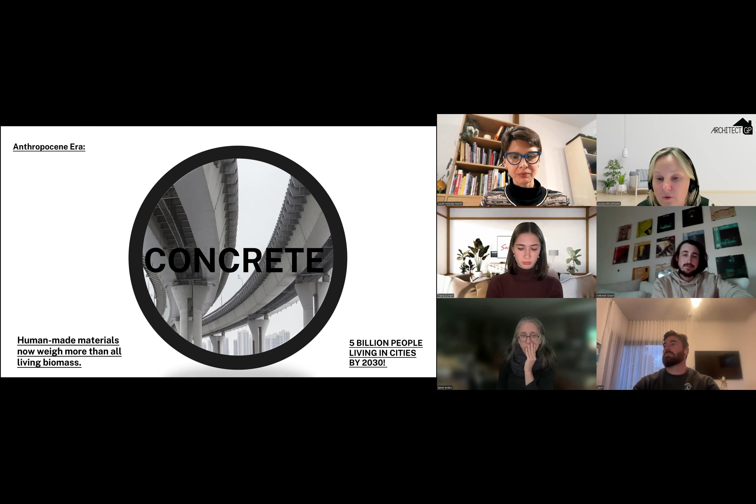But houses are important, buildings are important, but how can we get a little bit of emphasis back on trees and biomass? I think that's one of our big challenges now. I've seen this slide a lot, you probably have too, but it's good to contextualize it. The building industry employs 7 or 8% of people, so it's an important employer, but it's also a contributor to climate change.

So we can do our part. It's something that, you know, I've been working for 30 years and I did study sustainability at university, but it hasn't really been mainstream in practice. It hasn't really been discussed amongst my clients as much as I would have thought in my career, but we are seeing a big upshift in people's awareness. I might be alone, but I do think the industry has really kind of ignored this a little.

And we have been building some of the world's biggest houses, and that's a little bit of a shock to think about. How can we live in houses bigger than—you hear about the Americans, but they're 236 square metres. The average Australian home is bigger than the average new American home. It's quite surprising—the land is big, and we are bigger.

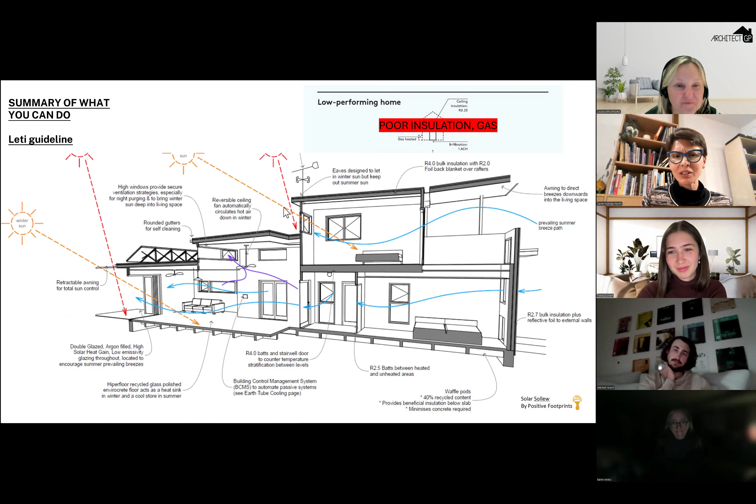So Australian houses are leaky. I hope everyone feels inspired to think about insulation, that it's sexy. It should be sexy talking about insulation. You know what else is sexy? Draft proofing, and we'll get on to that. This is a great slide from Jeremy, I'm a huge Jeremy Spencer fan.

We're going to show you one of his other diagrams, but this talks about our values for insulation, 2.5 for the floors, and obviously getting your orientation with your sun, thinking about the sun, getting it in when it's winter and cold, and looking at prevailing winds. So I think that's a great diagram that we probably need to pin up and stick on our wall.

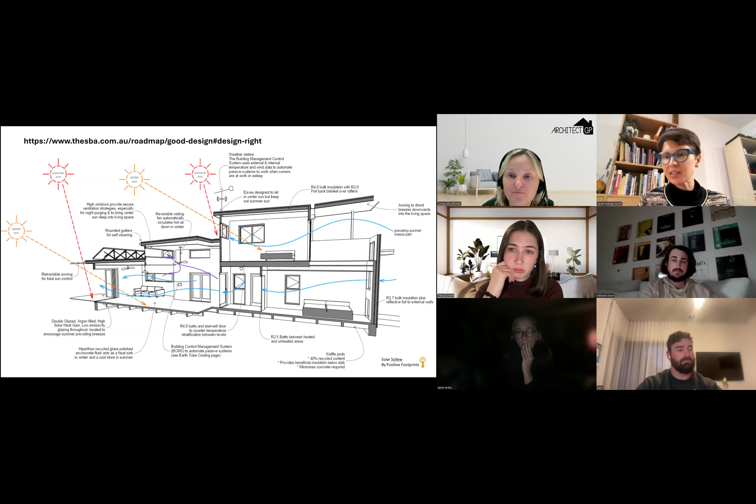Yeah, he's got R2.7 bulk insulation as kind of a rule of thumb. And I reckon, especially for southern areas, anywhere Sydney and south, that's kind of where we're at. But even the NCC puts the R value, so your insulation rate, your wall insulation standard for walls in Hobart, about 3.5, just as a minimum standard. Whereas up in Darwin, tropics, it's still 1.4 because insulation works both ways.

So it's putting a blanket around something, whether you're keeping it warm or whether you're wrapping your ice cream in the towel in the back of the car so you can get it home. Insulation also helps keep things cool as well. So yeah, it works both ways.

And most of us are living in single glazed houses, and that's why they're cold. So, spending the money on double glazing and low E, I think is probably the next step. And the next step is thermally broken frames, because you don't just lose heat through the glazing, you lose it through the frame itself. So if you're going aluminium windows for maintenance, longevity, and ultimately recyclability, if you can afford thermally broken, that's another step with your double glazing.

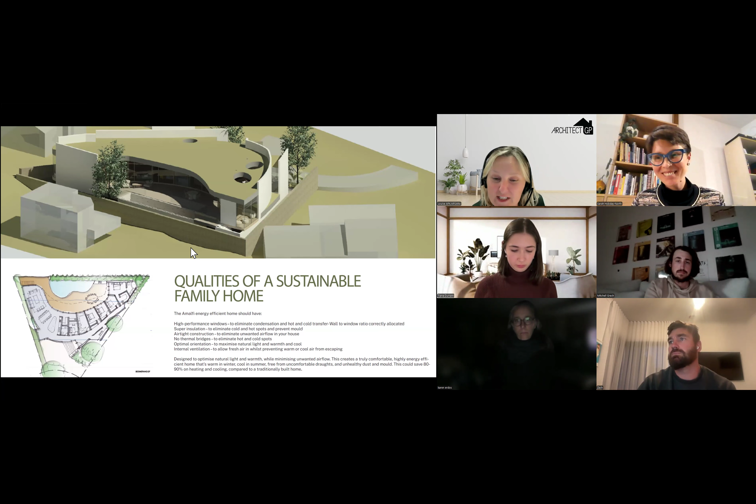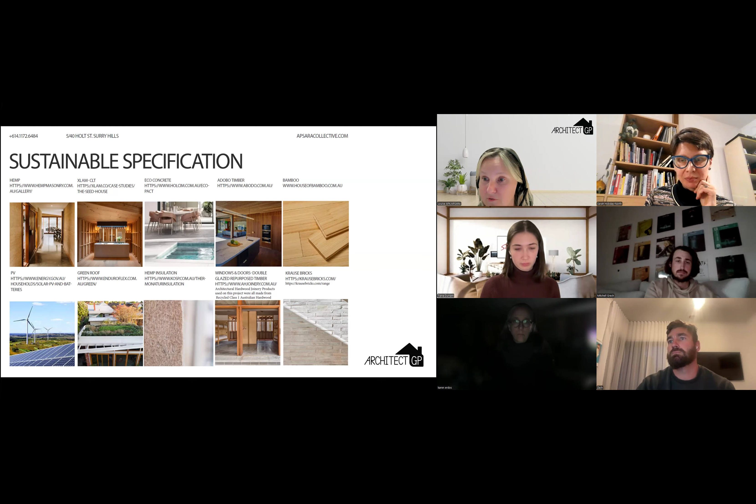Capturing the sun. And I'm trying to tell my clients from early on all the sustainable principles that I'd like them to use. I did find a lot of this information out, I have to be honest, from the Breathe material guides, as well as a lot of the training sessions I've been attending over the years, and trying to talk to my clients very early on about the look and the feel, and getting them to do their homework.

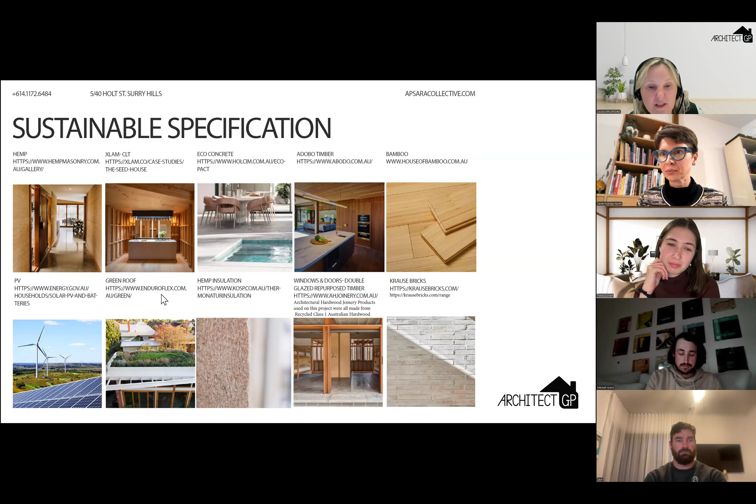So hemp, I think, is really the future. CLT, eco concrete, looking at trying to repurpose Australian hardwood doors and windows if possible, hemp insulation. Krause bricks are actually low carbon, looking at House of Bamboo, looking at air tightness, heat pumps, appliances, and tapware with the no plating from Sussex Taps, and really just trying to get my materials and approach correct.

I'm sure most architects in Architect GP Service are doing the same thing. But look, I think around the world, we're seeing a lot of education about getting insulation looking sexy. Look at this with the chunky insulation. This is in Germany, but really teaching everyone who's walking by and who's on site, putting that drawing right there on the facade so everyone feels connected to the importance.

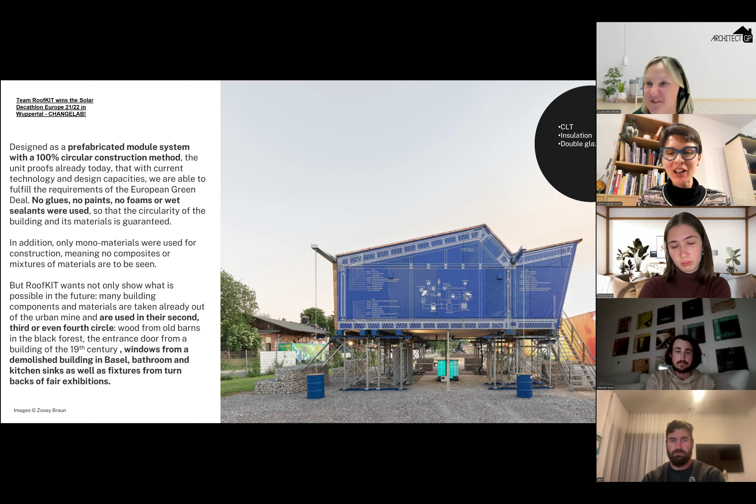It's a great one for the builders, because look at that. Our drawings are our blueprint. It's what gets built. They're not just lines on a piece of paper. It represents real stuff happening on site.

I love this 1-to-1 scale. It's a work of art. Yeah, maybe I should do this more. But this project here, if anyone wants the link, is basically designed for disassembly, no glues, no paints, mostly recycled elements, and it's a beautiful little humble design, and I think this is really the future of where housing's going.

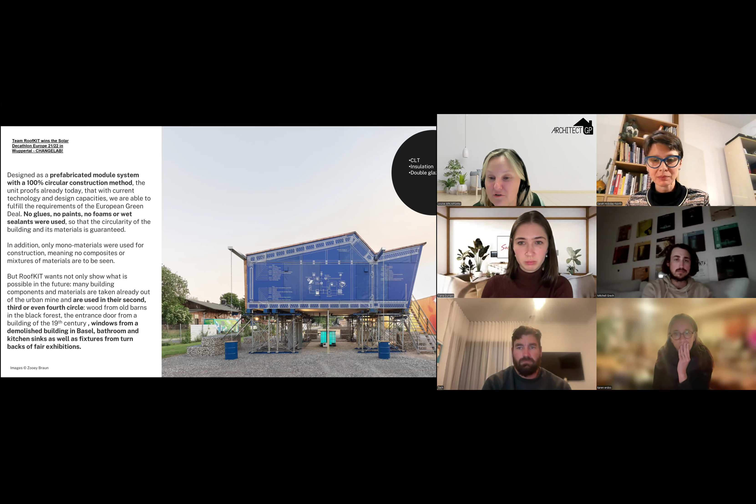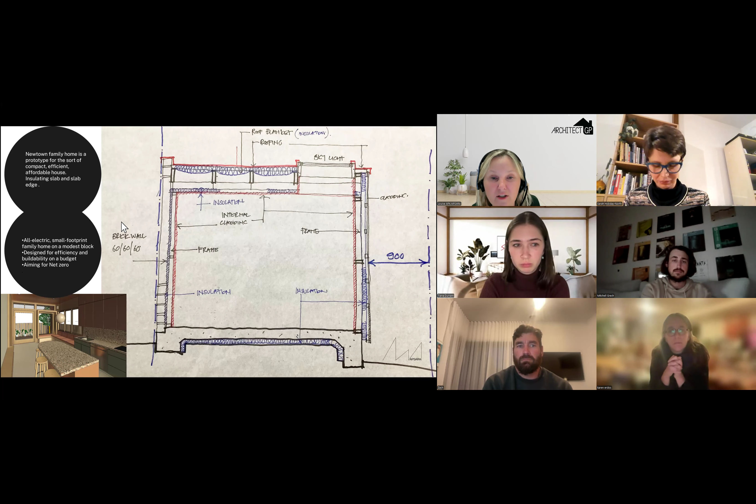So there's a lot of technical data that we need to really embrace about getting it, the cost versus the thermal. That's where I think I want to head next, is learning a bit more about that. But for the moment, what I tried to do was start to get my values in and check all the performances, and I was aiming for 4.2 on my walls.

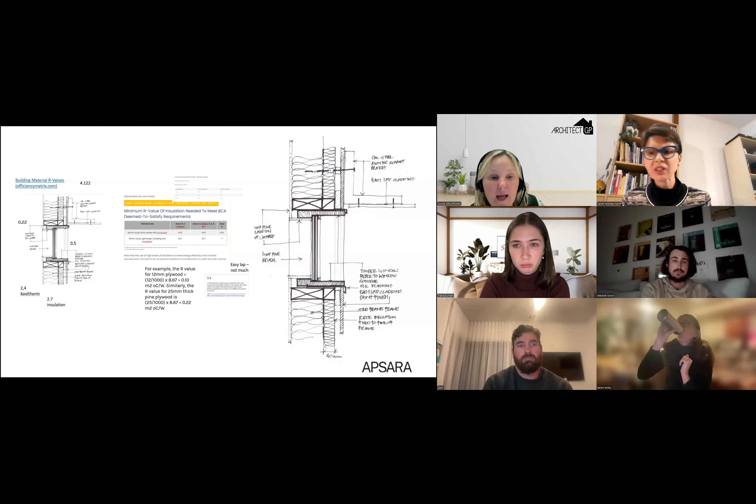I was trying to have good conversations with the builder about these ideas and run it through the client. On a recent project I inherited from another architect, we discussed with the builder how to increase the R value for the external walls. The most efficient way was to upgrade from 90mm studs to standard 140s around the perimeter, so we could fit a thicker batt instead of R2.5, we used R3.5 batts. That has transformed the thermal performance of the envelope, and it's a really practical builder-led solution.

What I want to say about this is building wrap totally matters. Whether it's wrap, sisalation, sarking, or a vapor barrier, there's technical terminology and functions, but a building stud frame at construction should be wrapped up like a department store present, taped, sealed, beautifully done. If it's flappy, if it's got holes, if where pipes come out at penetrations it's not taped and sealed properly, your building becomes like a colander, letting draft permeate between your weatherboards and cladding overlaps. You lose the beautifully conditioned air, whether passive or active, and you're almost living in a tent if your building wrap isn't properly sealed. This is about site culture, and also about an owner who knows to demand it and expects that standard.

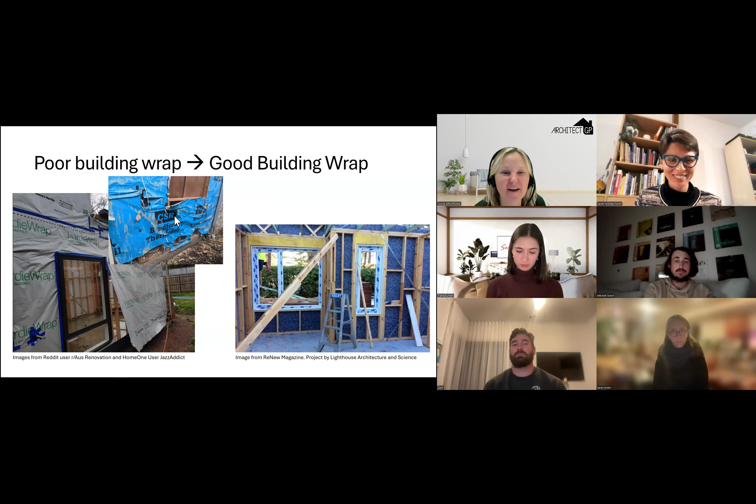So, Jeremy Spencer with Australian Builders Declare produced this checklist that I can give you the link to. I follow Jeremy now — this is a 2-page checklist for builders and all subbies to tick off as they go, giving the client quality assurance. I think this is a wonderful document for consumers to know that after paying significant money and time, they'll end up with a better product. I've now put this in all my documents and share it with the client and builder early on. Young builders want to do this, so it's about working with the right team. I feel like this is a no-brainer, and I'm so happy Jeremy shared this. I now put this standard into every one of my projects, so I know clients are getting what they paid for — airtightness and quality construction.

So just in summary, building less and building smarter is where architects are really good, making sure your smaller building gives you what you need and works efficiently — looking at orientation, window-to-wall ratio, reducing glass but putting it in the right spots, thermal efficiency, natural ventilation, getting off gas, looking at shading and dematerializing. Once you see it like that, I think it's easy to do. What do you think, everyone?

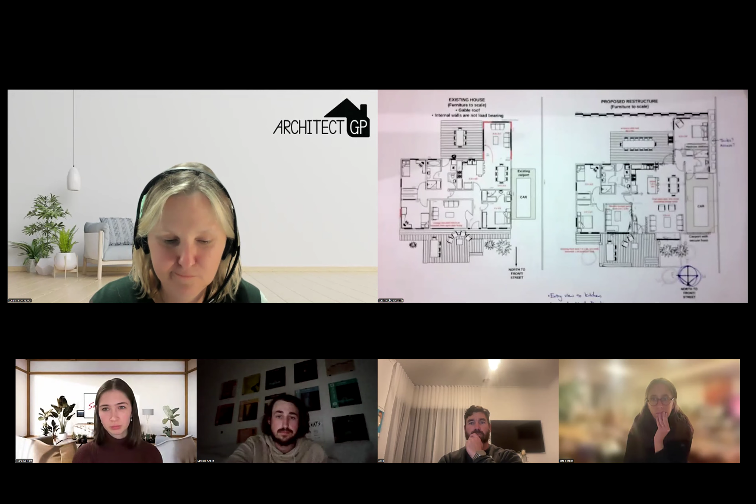I'm here, but I didn't send a floor plan in. Oh, probably wasn't me, sorry. Let's see, anyone? Sorry, I haven't got my camera on either. That's okay Jane, thanks for being here. Me, that's me, oh here we are. The other Jane, welcome, thank you very much.

Thanks. Okay, so we've got an existing home that you're renovating, extending, with a new bedroom wing up here. So what are your maybe top two concerns that have brought you here, that you're thinking about in this plan?

We have actually been through a process with a building designer, and we were still trying to maintain all of the living at the back of the house, mainly for privacy from the street and the age of our kids. As time has ticked on and our kids have gotten older, and I start thinking maybe they won't always be living in this house with us, I start thinking again about whether we could reorient the living areas to the north.

The reason it does involve demolition of an extension lounge room at the back that is 3.4 by 4.7 meters, and shifting it, is also to have a master suite that could be locked off. We live in a holiday area, so that might give us some flexibility to rent the house out and go traveling and still have a room that's ours.

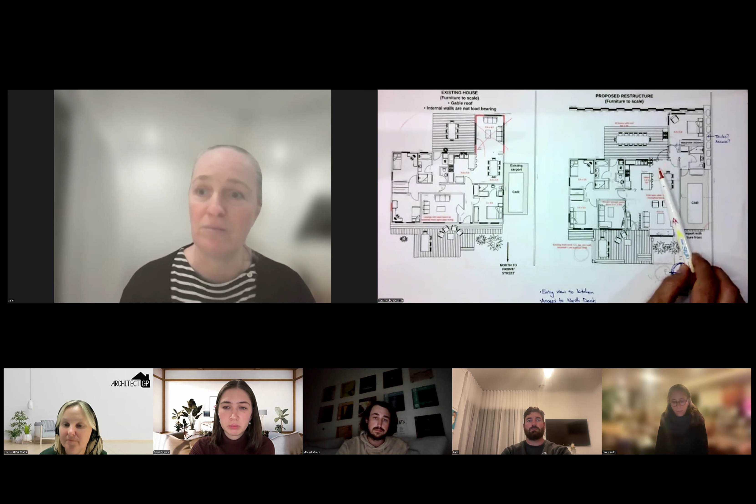But the main thing is living in a dark home that, in winter, the main living spaces are dark and cold, and not really open. I don't mind them being small, but they're actually quite compartmentalized at the moment.

Look, this is a great shift, and I'm aware we've got at least 3 architects in this call, so there'll probably be 6 different interpretations of how you could do various things. Great.

But shifting the living areas to the north is a lovely idea, and I'm pleased to see you're open to embracing a deck and a real living area at the front of the house. I think that's fantastic, it's a great community gesture too - you get to see people on the street.

I wonder whether, with that in mind, this window - it looks like you've envisaged that as a bay window or some kind of window seat - I wonder whether that is actually a sliding door. What if the deck extended here so that your new living space becomes connected this way, meaning you don't have to use just the front door to get to your new living area. It becomes a social connection from the room, not just from the main entry point.

And then increasing the glazing size here, you can embrace that north - the dotted line meaning roof overhang, with adequate shading for the summertime. But maybe that's a door to really embrace that front deck.

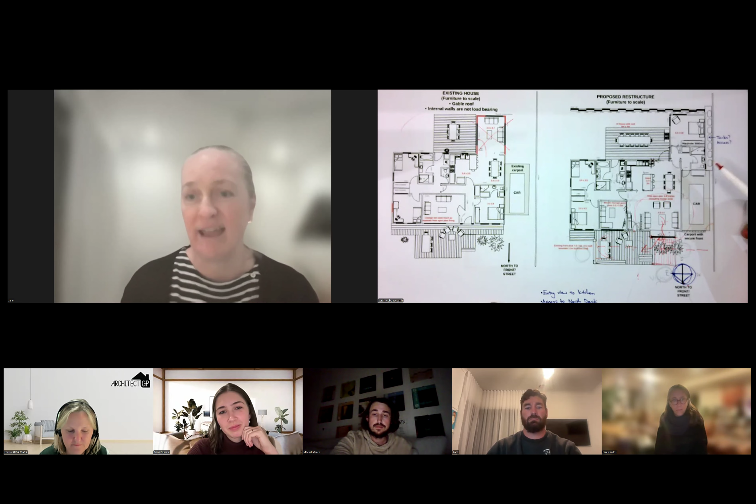Yeah, do you want me to answer? No, why not. There's a couple of limitations - the deck is already there, we expanded that during COVID out the front. We use it a lot, we've hosted band sessions in our front yard. Amazing, it's a great cul-de-sac that's really quiet.

I have a mature lemon tree in front of that window. Oh, I see. And I don't have a lot of sun because we've got a lot of gum trees, but I have a thriving mature lemon tree, and I feel like it is constraining me quite a lot because I don't really want to lose it, but I want to keep an open mind.

You've seen those gorgeous decks that have the tree breaking out of the deck. A deck doesn't mean obliteration - it could be a gorgeous, fun gesture at the front there, and the lemon tree even providing you some of that natural shade to the north.

Gorgeous, yeah, okay. From this, two more things I'd love to suggest about the floor plan. The east window through here - I see what you're trying to do with a secure, private zone at the back. I wonder about moving the door to the bedroom to be a cavity slider through here, opening up this throat.

So that you could actually have eastern glazing here, and this neutral zone becomes much more light filled, more open feeling to the deck - almost like a little breezeway, a little internal courtyard coming through. And then with another pocket sliding door here, you can close off various other sections, so this becomes more generous and larger without any loss of amenity to the bedroom behind.

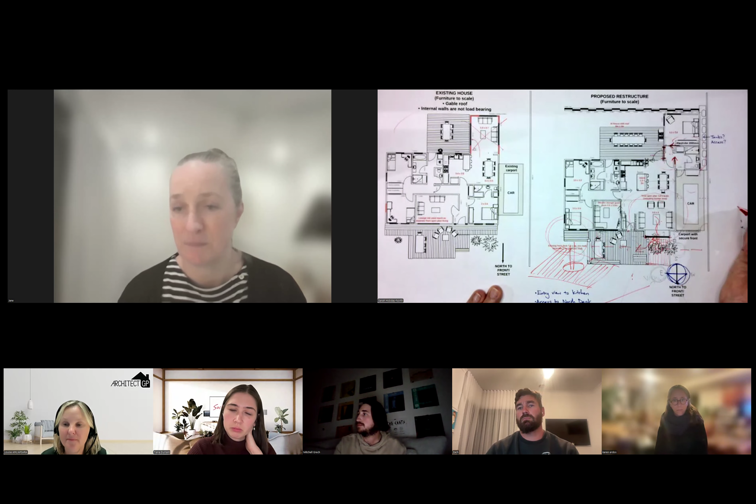And then coming in the front door, Louise and I noticed that the first thing you see from the front door is the kitchen, and maybe either a sliding door to close off and give privacy to the kitchen might be desirable, or retaining a bit more of the wall here to frame an entry space. Yeah, I like that - in that zone, so that you just give it a bit more grace. I get what you're doing here.

You want to be able to open up this lounge so that you could have a sort of combined space. But let's not neglect a sense of arrival into the home and then the view through to the kitchen.

And look, balancing the glazing to your south, I think might also warrant another look. Is this big door going to be a glazed door there? Could it be a slider? What's going to work best for the ease of access to make best use of this space at the rear?

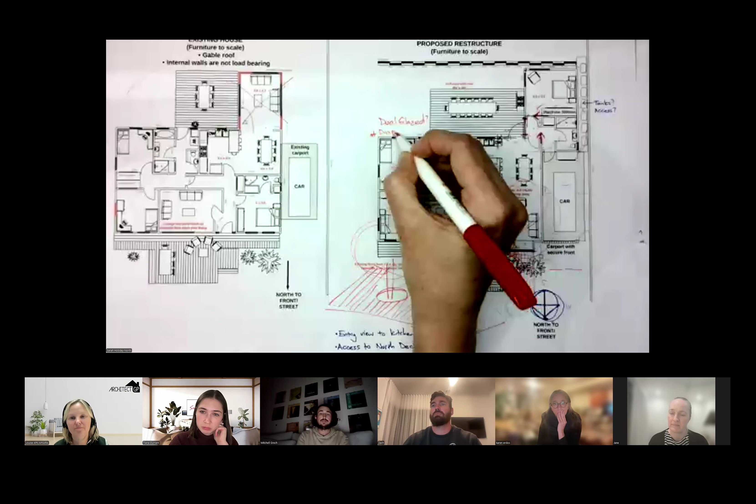And then, of course, your existing windows that get retained, can they be retrofitted dual glazed? And picking up on Louise's tips, drapes, even looking at a window furnishing strategy for those existing windows can increase the luxury feeling from an interior design point of view, but also the thermal comfort of those rooms long term.

I wondered if these were tanks. I haven't got time to talk about it much at the moment, but thinking about whole building, where can you store water on the site as well? Look at your roof pitches, look at your falls. Where are the downpipes naturally ending up?

And as you open up this new, expand on the northern area, think about the shading to this as well, so you get the balance right.

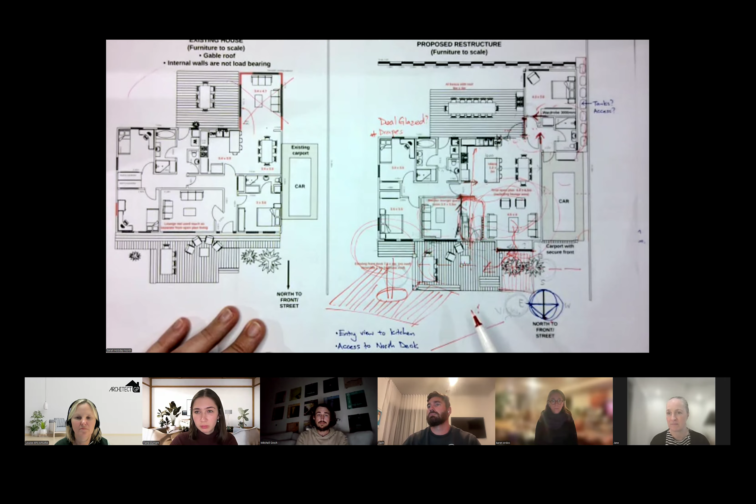So Jane, that's a lot of fun. And Mitchell's got some, hi Mitchell, you've got some similar kind of ideas in the last sort of few minutes here. I saw a theme between yours and Jane's plan here with that peninsula sort of extension out the rear. You've even got the same orientation with north to the front. So maybe a few things I've said to Jane resonate as well.

So your key northern window is down here to the existing living room. I wonder about opening that up, and looking at a specific shading strategy, depending on where it is on the site, even a pergola kind of strategy. How can this actually be really turned into, as Jane is looking at doing and has done, a warm living outdoor space connected to the house?

And then from an engineering point of view, what if you had some awesome timber beams running through here and opening this up more, so you're making more of getting that northern light right through your living area. You've already now got the north-south cross ventilation happening, which is fantastic.

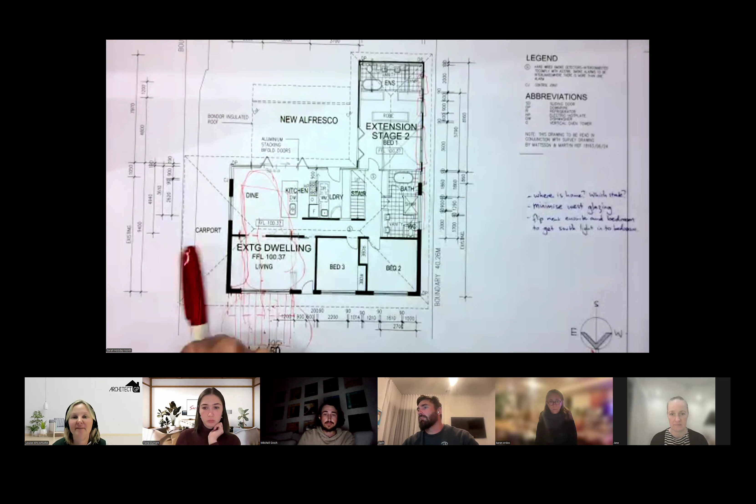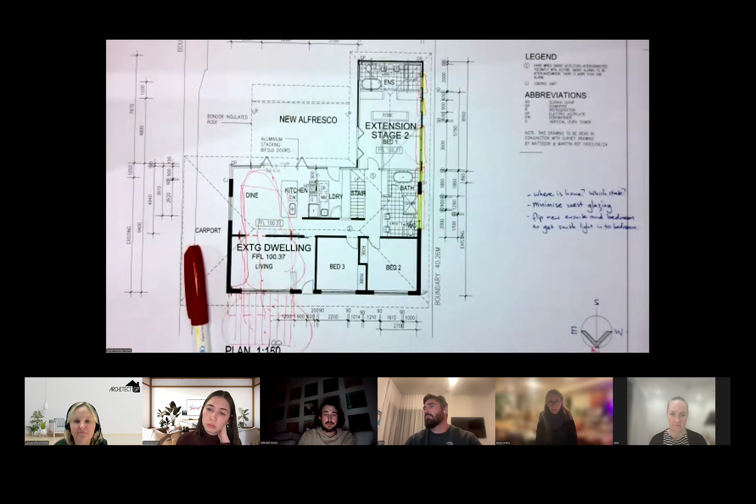A flag might be, and this picks up on what Louise was saying about the window to wall ratios, depending on which orientation you're looking at. And on your west orientation, there is a lot of window happening through there. So my question to myself is, is there a way that you can revisit the extent and need of that western glazing? Because that's where a lot of heat gain's going to come in.

I'll shoot with one thought I had about reducing the western glazing to the bedroom suite extension, which is to work on flipping the bathroom location, looking at making a more efficient bathroom, consolidating the bathroom so you've got all your plumbing together.

Let's look at whether both bathrooms need a bath. Maybe they do. Is there a way to? Yeah, that definitely is a thing. No, at the moment we don't. We're looking to take the bath out completely.

Right. And right now where that stair is, to utilize a bit of space, originally that's where the bathroom is right now, and it was looking at removing the bath from that.

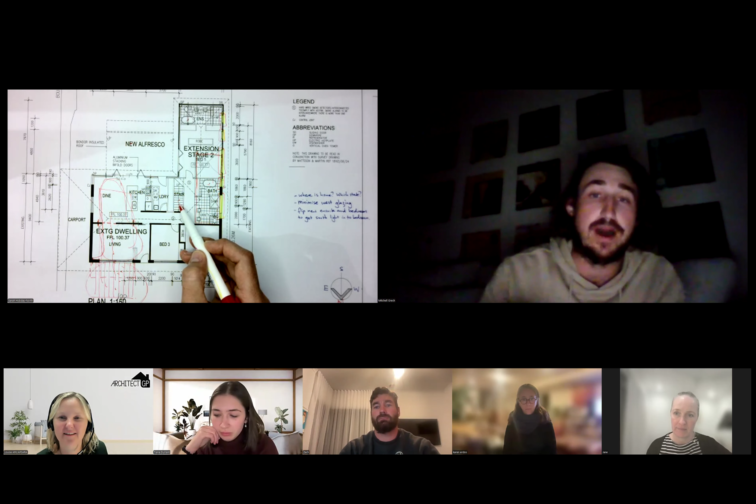Well, you're breaking up a bit there, Mitch. I'm not getting your words very well, but I think that in terms of designing smaller and smarter, as Louise pointed out, really tightening up your bathroom design here can be really powerful, because if you can consolidate your wet areas, you get more efficient construction and more efficient roughing in of your plumbing.

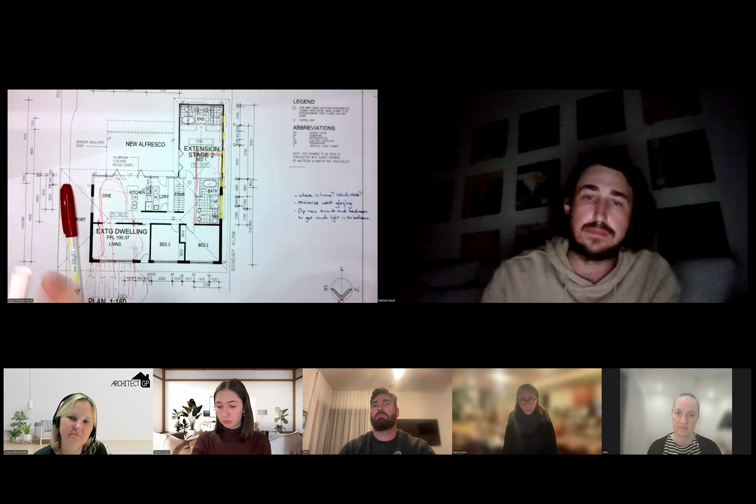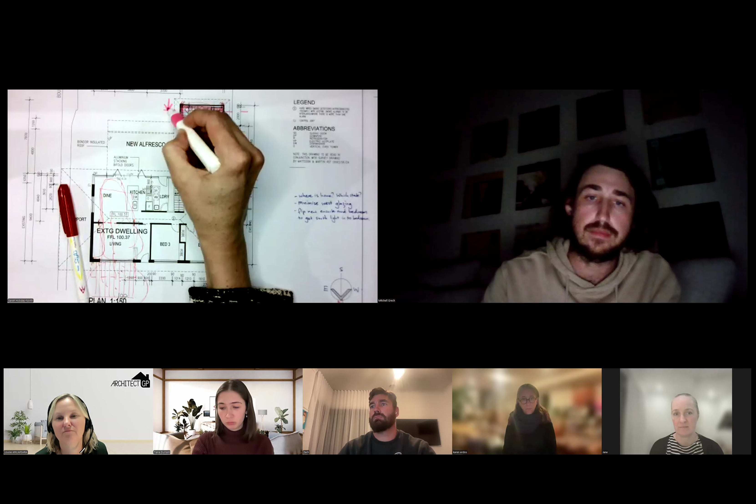So you flip, and now this space is the master suite. Maybe it can even be reduced and brought in, so you're building fewer square meters. And then what it allows you to do is move these walls, which were windows on the west, and emphasize your east and your south.

So although your southern windows would have heat loss, we're double glazing these to reduce the heat loss, but you're blocking against that heat gain, which is a bit of a monster for comfort in the summertime. So the advice I'm giving is necessarily a bit fast and rough, and ready, and I don't know what your neighbors are doing. I don't know how much depth you've got to the backyard, but these are the questions I'd be investigating with you to look for those efficiencies.

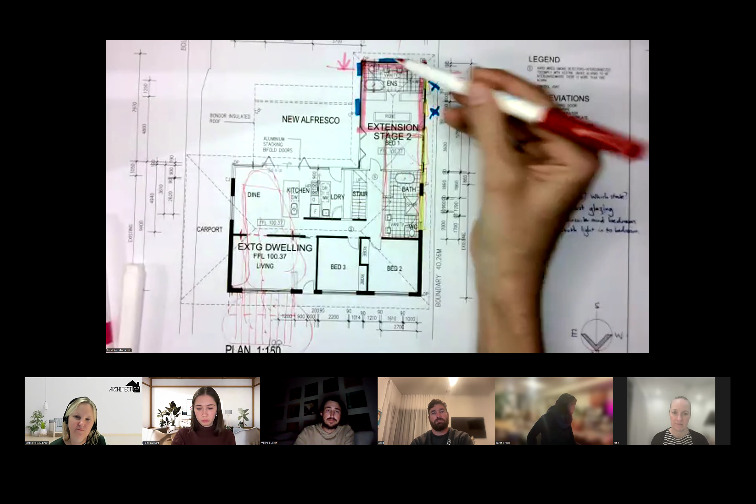Maybe the size of the construction can be reduced. Every square meter you don't have to build, you're probably saving $4,000 to $5,000. And depending on where you're building in Sydney, it could be a heck of a lot more. Yeah, 15 to 20. Good grief.

But it's a nice little plan there, Mitch. It's nice. Yeah, there's a lot of good stuff going on here.

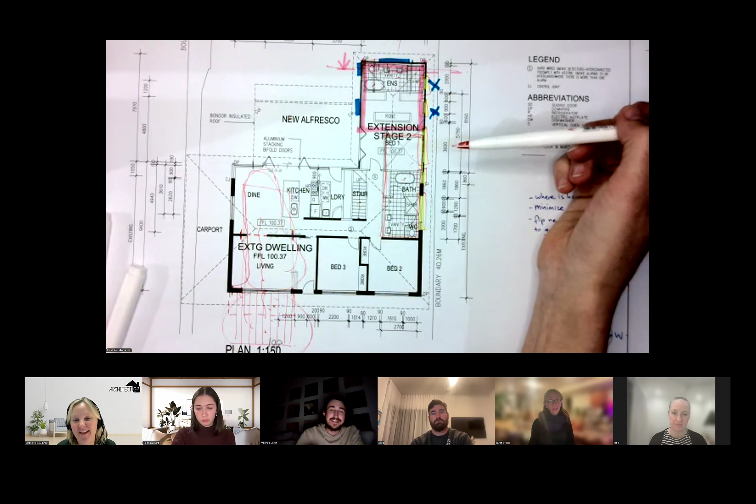Thank you. We've had problems again with the building designer that we started with not understanding what I understand, and there are some aspects of that we're definitely not happy with and wanted to change. We've just put the project on hold for now, but it originated from not wanting to alter the floor plan too much from what it is currently. That's how we start with it. I would never build that house, but we're working with the budget we've got, trying to leave 90% of the existing home.

As Louisa said, you have got the right approach for deep sustainability, that there's a lot to be gained by working with what you've got. Even in terms of character of a house, I think that adds to the social sustainability of a house, how it blends into the streetscape. Maybe it's controversial for an architect to say, but not every house has to make the boldest architectural statement. It's about the people that are living in it, and feeling connected to place as well.

And look, we're at time, but Zach, I've got things to say about yours too, and your key thing, and I've circled this North Point 27 times I think while I've been thinking about it, is that Zach has used an amazing resource that, if you don't know about it, our own Commonwealth government, bless them, in a bipartisan sense, have an amazing resource called yourhome.gov.au, and there's free floor plans for really neat, thoughtful homes, 2, 3, 4 bedroom homes, I believe. This is based, so Zach's is based on the Banksia house, which is an absolute classic.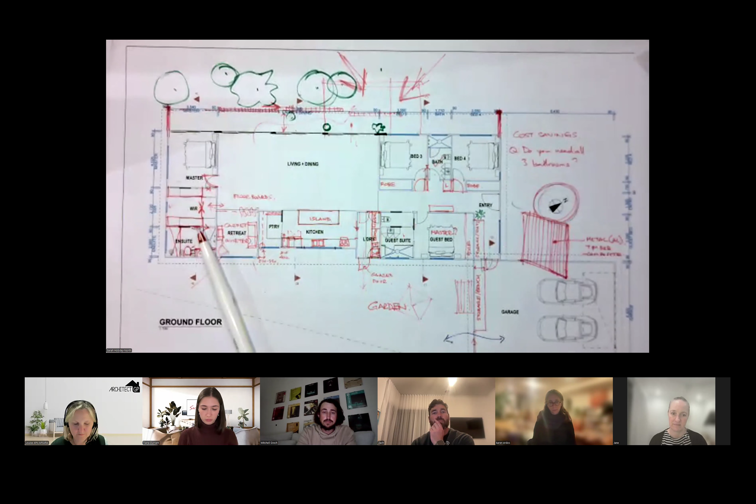The true Banksia house is oriented with this beautiful wall of windows to due north. Zach's got the challenge that he's got some beautiful views out here, but with a more westerly orientation. So that shifts the logic of the original design. And so I think the key thing I can say here for you Zach, is to contemplate.

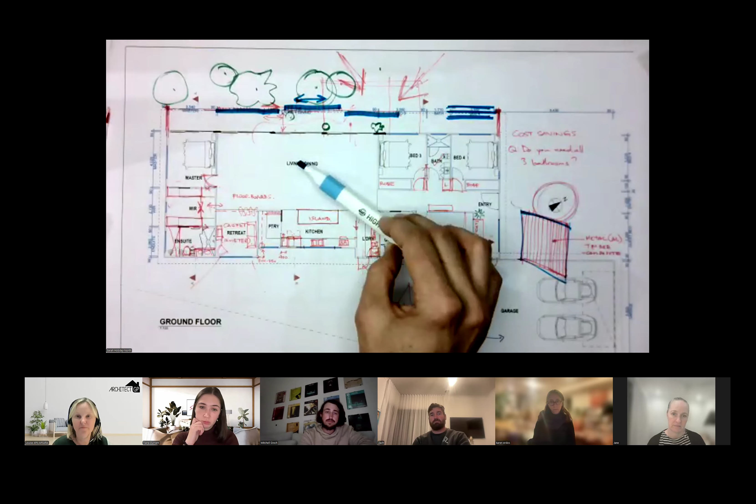You might look up, it's looking at high architecture, but Sean Godsell has a great language of screens and battens. So looking at, maybe you've got a system on a track out here, and a system of sliding screens, timber battened panels, which you can push aside and have them stacked to the side when you want it, when it's a nice clement day, when the sun is in a good spot and not overheating the house. You can have them all pushed away and enjoy that view.

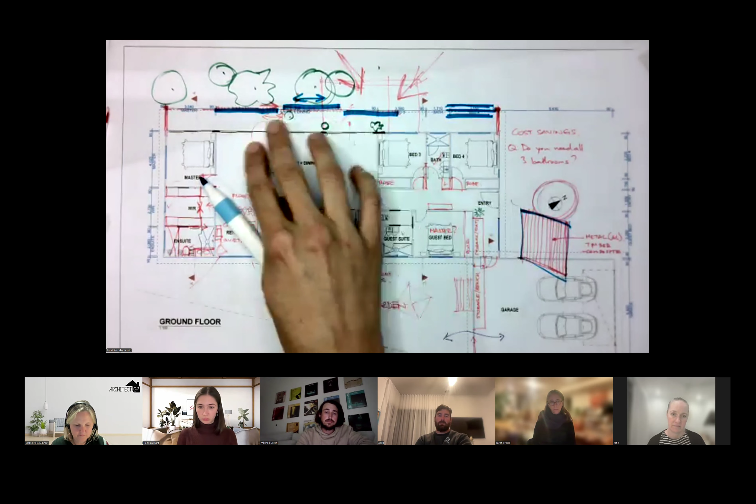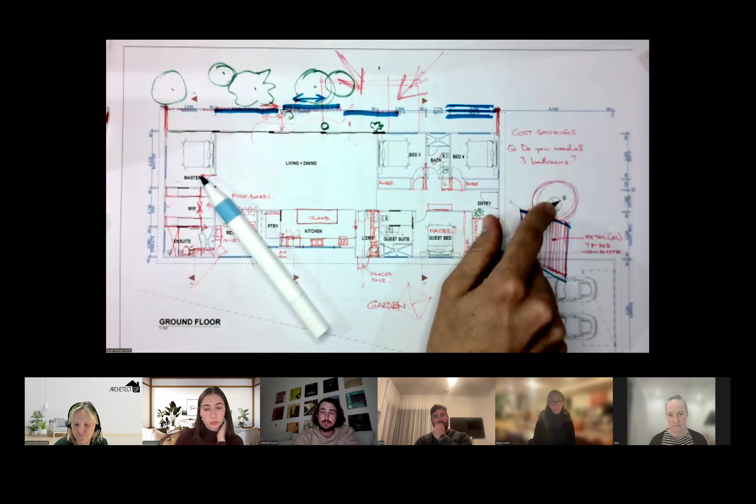But when the climate is getting harsh, when that low setting sun is starting to make this space uncomfortable, you can slide your screens back or have an angled louver system, looking at those more innovative practices to solve the problem. Sometimes this starts to look like fancy architecture. But the point is that a dynamic system like this, or an innovative solution, is about solving a really practical problem, which in this case, in the brief time that we've spoken, is about how do you enjoy the views and also address the orientation. And that's where some really interesting things can happen, which are actually really grounded in the science and in good design.

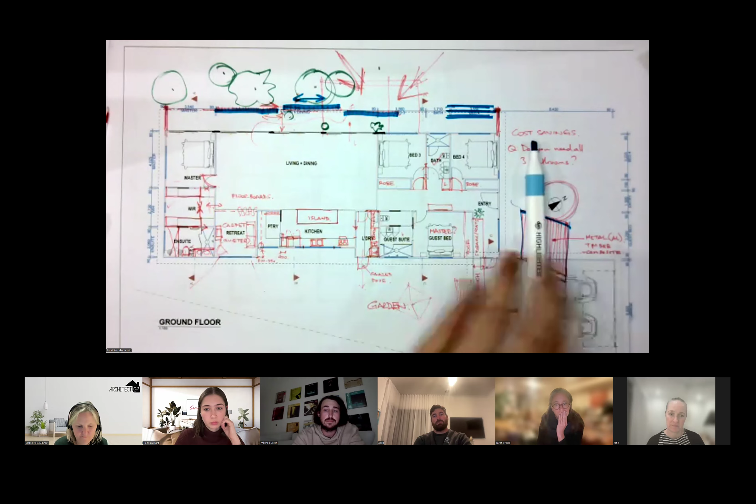And then, of course, planting is your friend as well to make that beautiful microclimate around the western side of your house. And so that house is actually going out in Ararat in the Grampians, where so that westerly is towards the Grampians. Oh, gorgeous. So I was actually looking to build some large timber structures out there and have vines growing over the top to block that. That was my thought, but I like the screen design. I've seen that in the sawmill house.

Yeah, and it can be both, and now you've got two seeds of ideas, and the design work is bringing that to the best solution for Ararat, for that block. That's fantastic, yeah, thank you.

Oh, it's a pleasure. And I like the Banksia house design that you've used, where I added the fourth bedroom. So this is an investment property - I'm in Torquay, and we've got a block out there that we're going to build a family house on, but this one is an investment house, like my tester for trying to build a passive and affordable house.

Great, do you know what, have you planned the wall thickness and insulation numbers yet? Yeah, so I'm a commercial builder by trade, we do mainly childcare centres. We build in a 140 frame as standard, and we put R3.2 sound batts in those walls, and then R5s in the ceilings.

But I'm looking to go SIPs. I'm talking with Studio House - I think his name is Andrew - to do a SIPs panel house, because I've got to travel for it, so I want something nice and quick to get locked up, with a really effective insulation barrier. I'm also talking to Bink about windows.